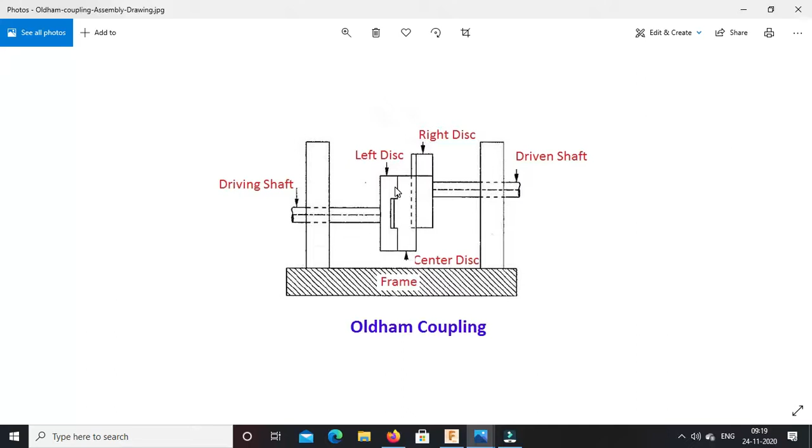Now if we want to see the working or animation of the Oldham's coupling, no part is stationary — all parts are moving because we want the shaft to rotate. So the shaft rotates, along with it the key and flange also rotate, this disc slides, and on the other side the flange along with its shaft and key also rotates. No part in this assembly is fixed.

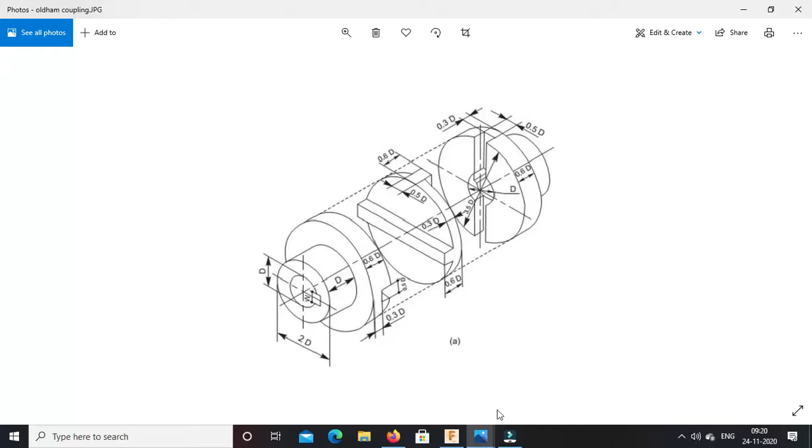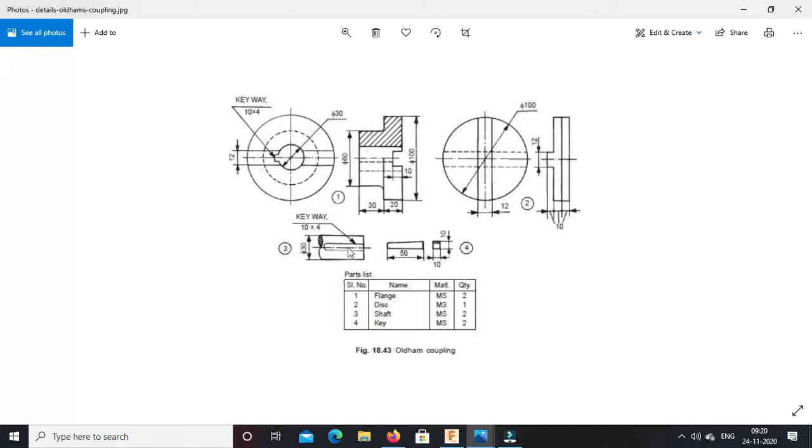But whenever we want to go for assembly, we need to fix some part, meaning we need to fix some component. So for that purpose, we will add one more component and make it the ground — that part will be fixed and all other parts will have motion. I will explain this while doing the assembly. We will start the assembly with the shaft because we want to connect this shaft along with the key to the flange.

So these are the individual parts we have prepared for the assembly. This one is the shaft, along which a keyway is cut along its length, and this is the rectangular key that is going to fit inside the keyway.

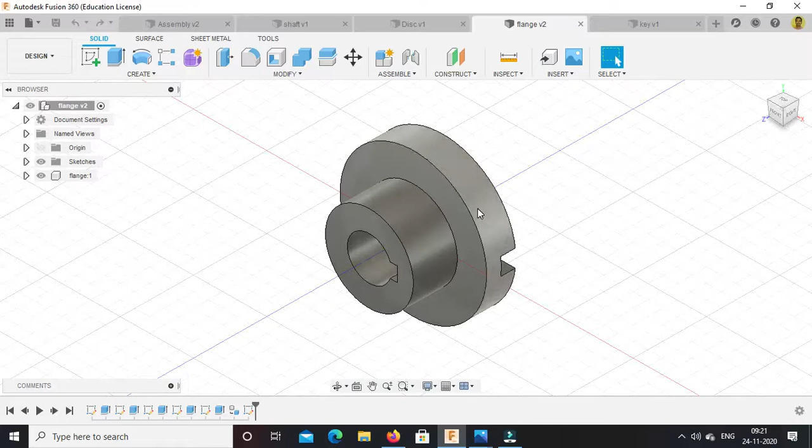Then this flange is there, which is going to attach over the shaft. Also we have provided a half keyway into this flange, so with the help of the key it will be connected to the shaft. Then this central disc is there.

On the other side we want the same arrangement, that means flange, key and shaft, but instead of making separate parts, we will make use of these parts only. It is not needed that we prepare two shafts; with the single shaft we can make the assembly. So we will start with this.

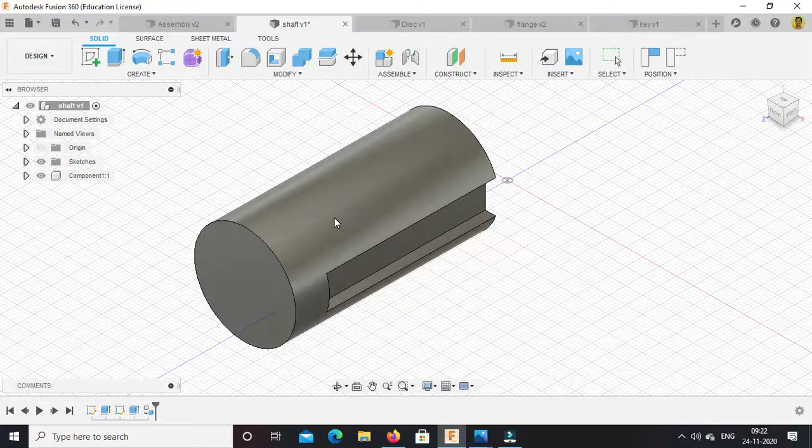Now if you observe, I have already converted all the bodies into components, which is the requirement for making the assembly. If I try to drag this component, it is movable, so I will bring it back to its original position.

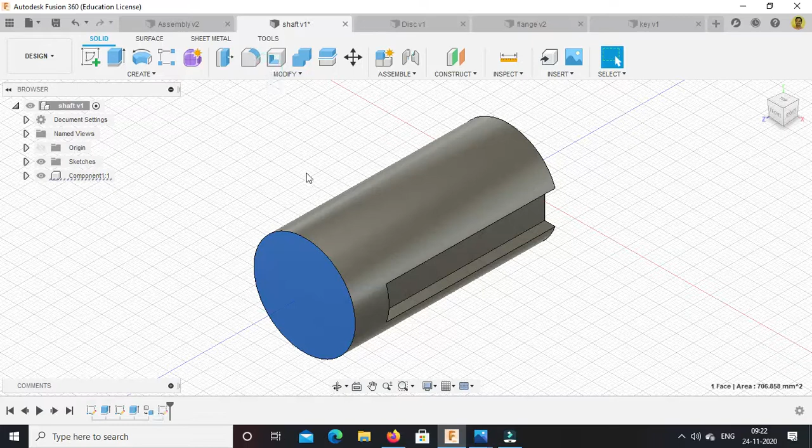Now what I will do is prepare one ring, which is nothing but the base component that we require, as I have explained. So just go to this plane, go to the create sketch option, and I will prepare one circular ring over here: 30, enter, press enter again, 40 let us suppose, enter, and finish this sketch mode.

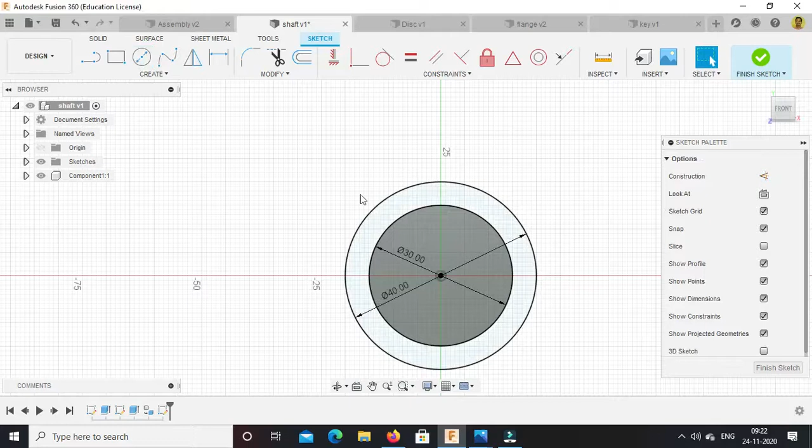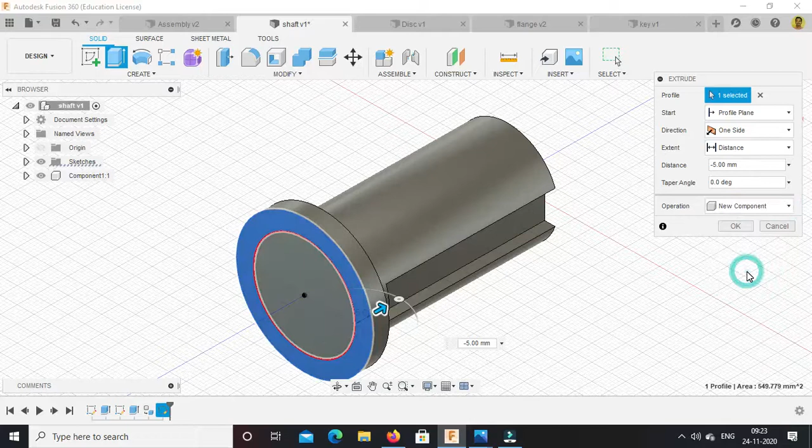Now I will extrude it, reversing the direction. Let us suppose a distance of -5, and instead of the join operation, let us select new component, then press OK.

Now if you observe, I have attached one ring to this shaft as a separate component. This shaft is a separate component and this ring is a separate component. If I try to move this, it is movable, but I will come back to the original position.

Now what I want is, as this shaft is rotating, I will fix this ring and provide a revolving motion to this shaft with respect to this ring. So just go to assembly. Already these components are connected at their place; only we want to provide a motion. For that we are going to make use of an as-built joint.

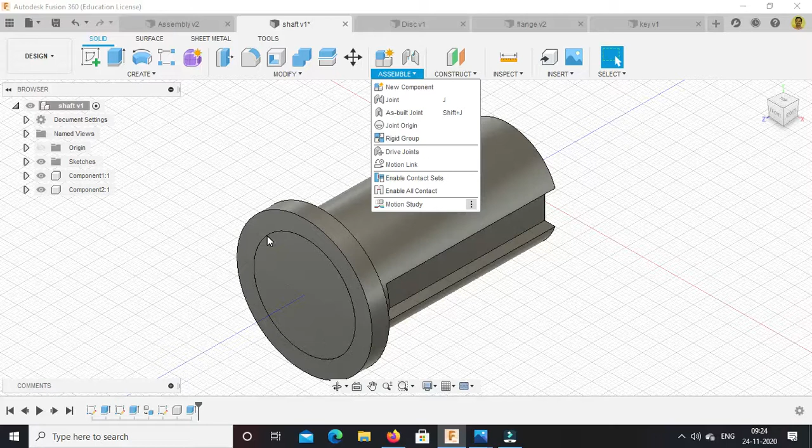Earlier whenever we used the joint command, the two parts were at separate positions, completely separated, but now the ring is at its position and we only want to specify the motion type. So for that we will use an as-built joint. First of all, make this ring as a ground so that it will be fixed.

Right click on it, ground. Now this ring is not movable, only the shaft is movable. We will come back to its original position, bringing the shaft to its original position, then select the as-built joint over here.

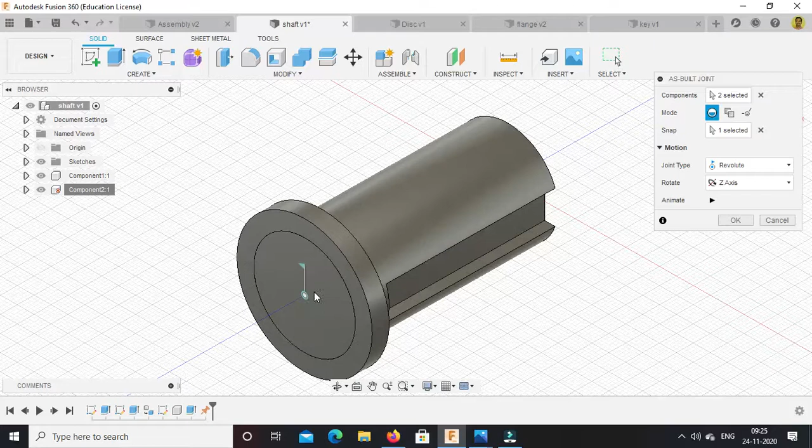Then we need to select the two components between which we want to provide a joint: this shaft and this ring. Whenever we want to take a reference for motion, we select this and select the center point, so this shaft will be rotating and this ring will remain fixed. We will press OK over here.

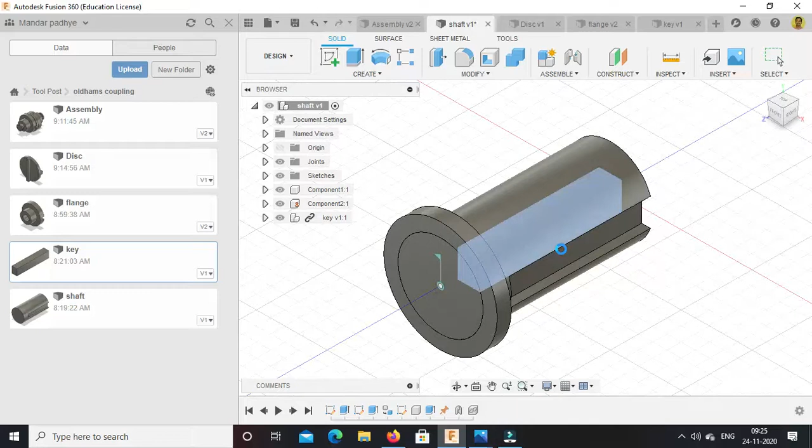Now we will attach a flange to this shaft. First we will insert the key or bring the key to this window, so just insert into current design, select this option, and we will bring the key into this window. We will drag it outside, close this data panel, press OK.

Now we want to attach this key to this keyway, or shaft. So just go to assembly. Now select joint, because these two components are separate now, so select this joint command.

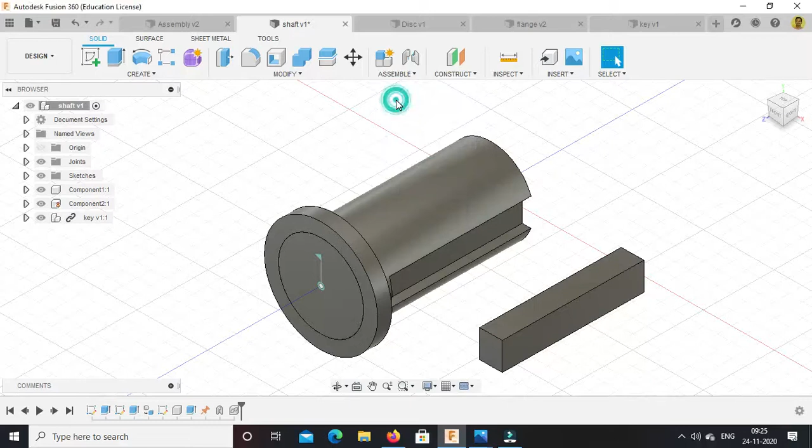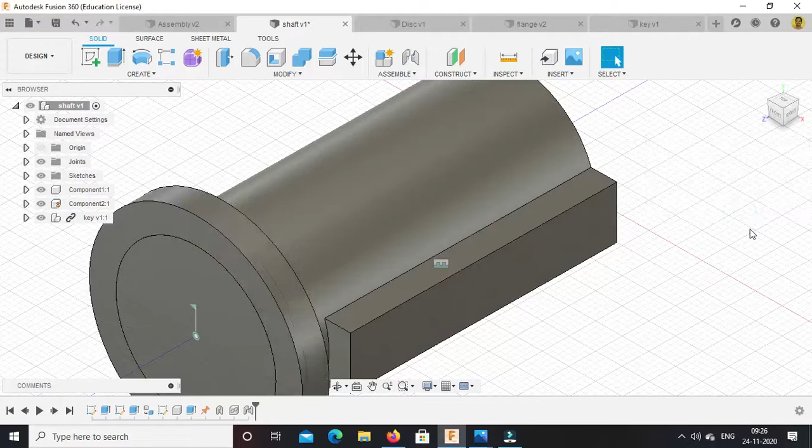Now select the face that we want to be in contact with each other, along with the center point, this center point and face. The same center point and face we will select on the shaft, and the motion type should be rigid because we don't want to move that key. So now if you observe, if we try to rotate this shaft along with the key, it will rotate. We come back to the original position.

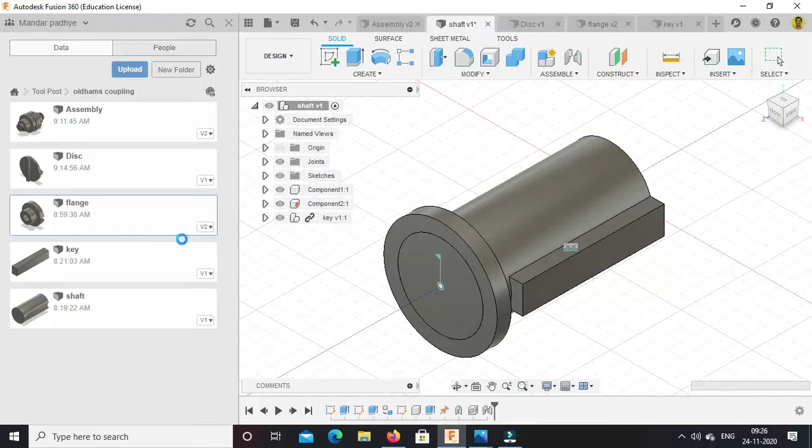Now we want to attach the flange to this shaft and key. So go to the data panel, insert this flange into the current design, press OK. Now we want to connect this flange to this key, along with the shaft, so again go to the joint command.

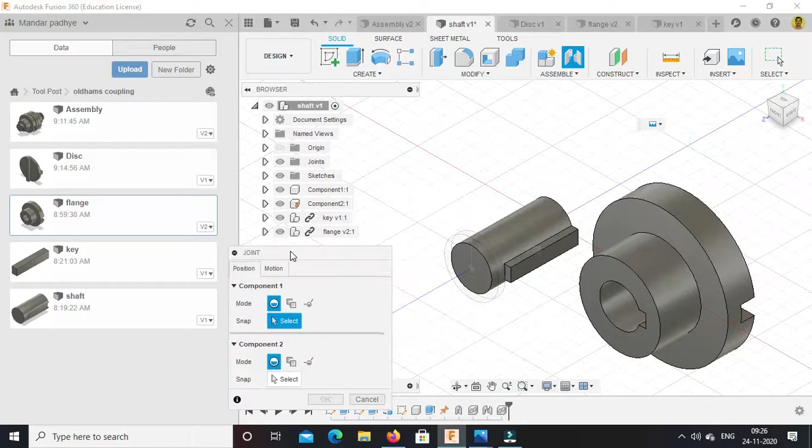Close this data panel. Now we will select this internal face of the keyway along with its center, and then connect it to the same surface with the center on the key. Now we want to check the alignment.

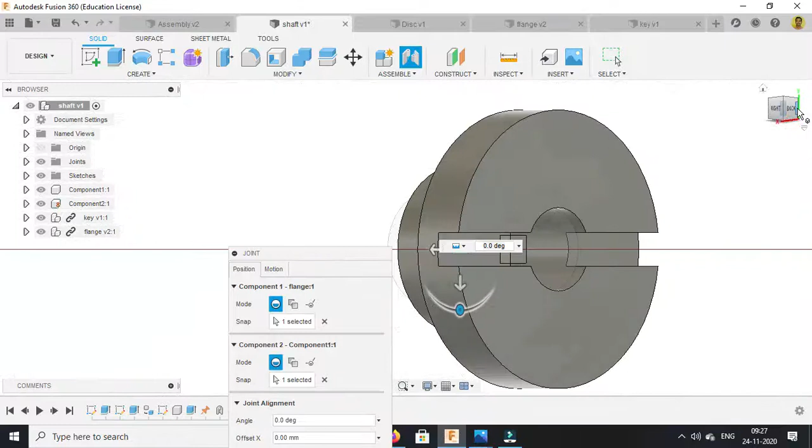If you observe, this key is coming outside, so for that we will just give an offset to it. Let us make the visual style a wireframe model and just drag it outside.

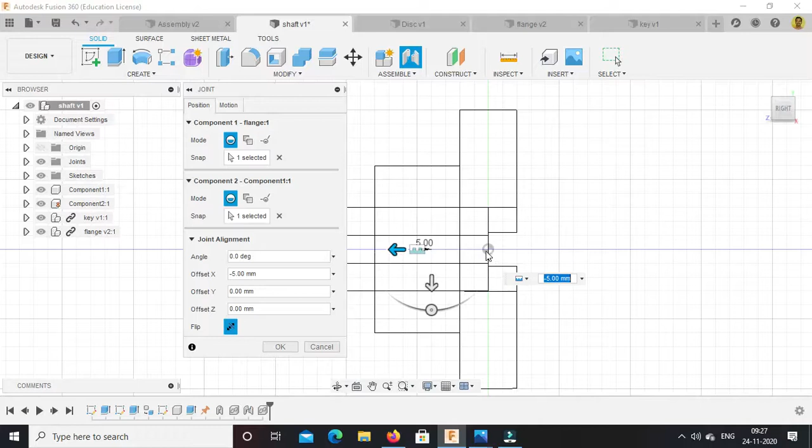Okay, so -5 is the offset in the direction of X. Press OK now. Go to visual style as visible edges only. If you observe, now the key is exactly fitted with the flange.

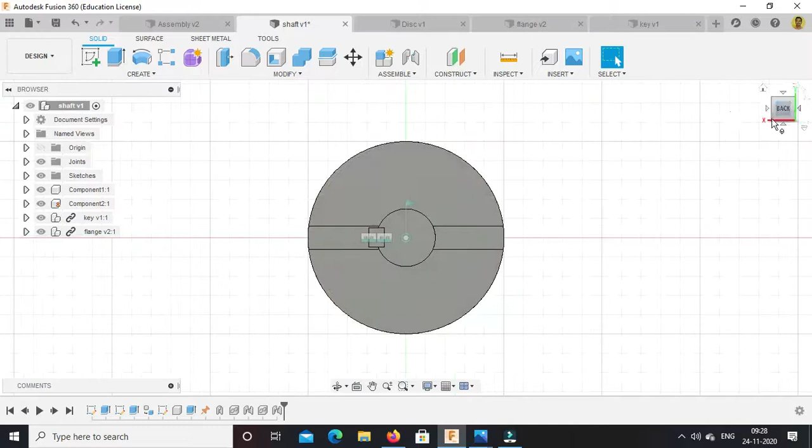Key is exactly fitted with the flange. Now if we rotate the shaft with this ring, along with the flange it will rotate, because all three components - flange, key and shaft - are rigidly connected with each other. So again come back to pivot position.

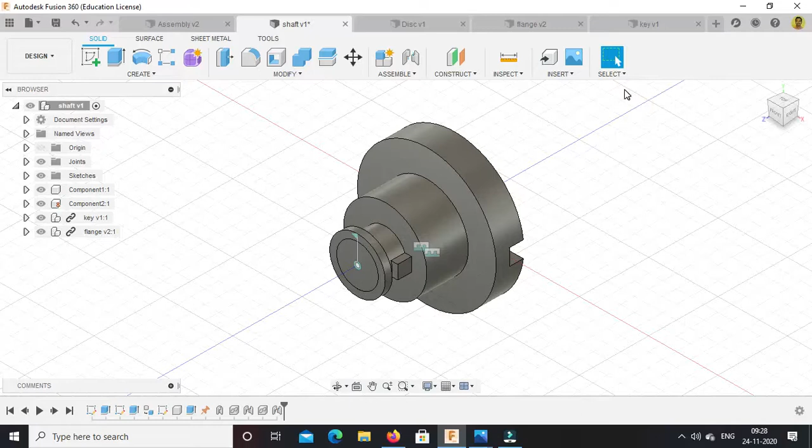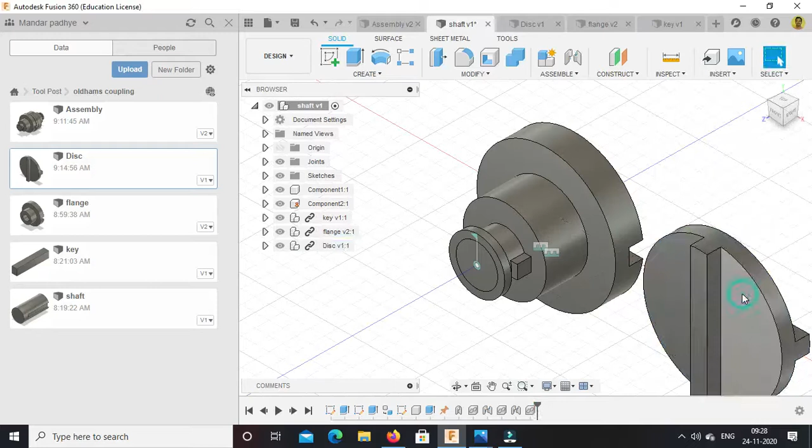Now we want to insert the disc into this assembly. Go to data panel, click on disc and insert into current design. Drag it outside, press OK, close this data panel. Now how do we want to connect this disc - whatever vertical rectangular extension is provided on this disc, we want to insert that extension into the rectangular recess we have provided in the flange.

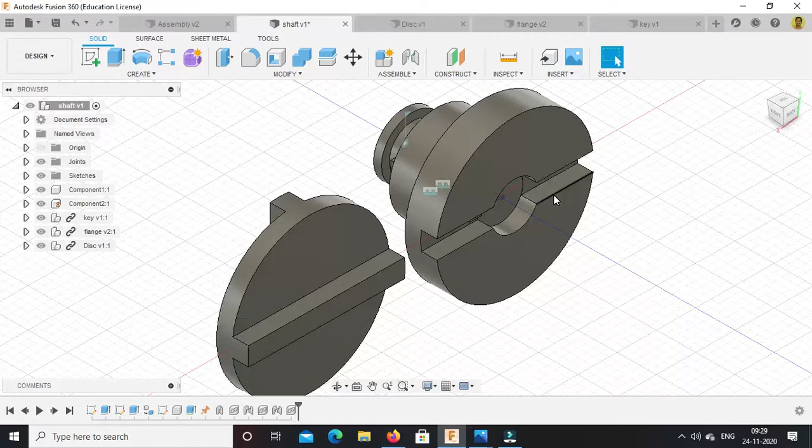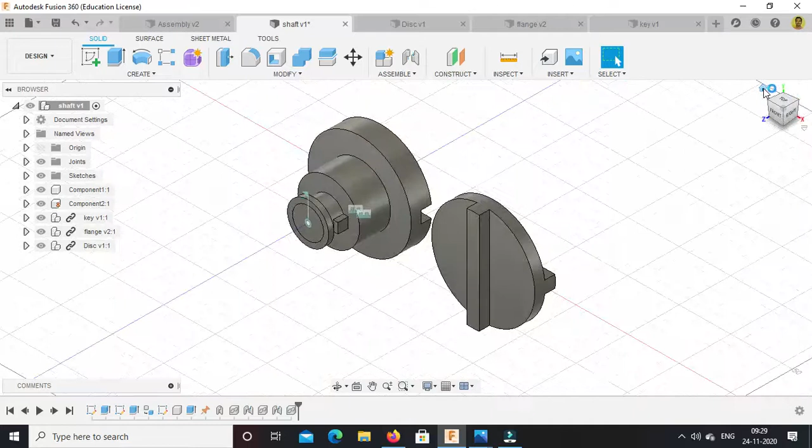So for that purpose we will create a joint. This vertical face of the rectangular recess should be in contact with the vertical face of this extension on the disc, and it should be in contact with the similar face on the recess provided in the flange, and motion should be sliding motion. So just go to joint.

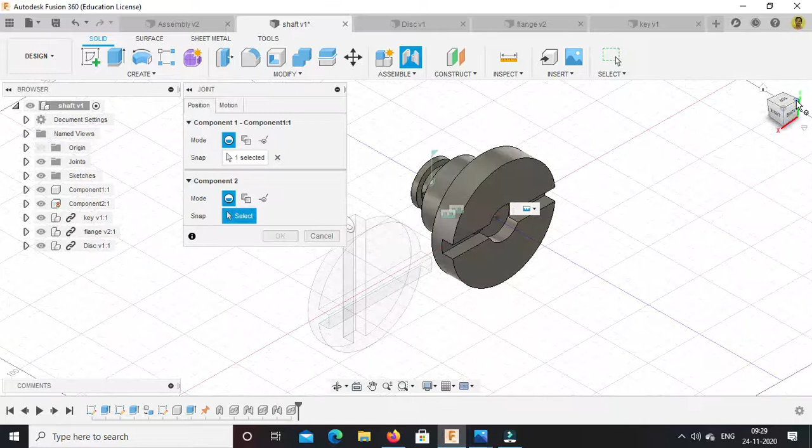Now select this with this as a reference point, this circle, and along with that let us suppose we will select this point, same, and we will provide here offset which is required.

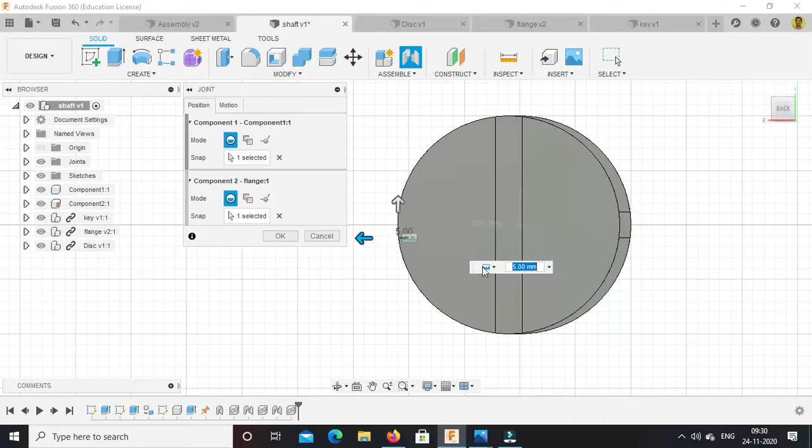Of 5 mm, let us suppose - for what purpose it is provided I will explain you later on. So it is 5 mm offset. If you observe, along with the flange, this disc is going to come outside by 5 mm, and motion type should be sliding.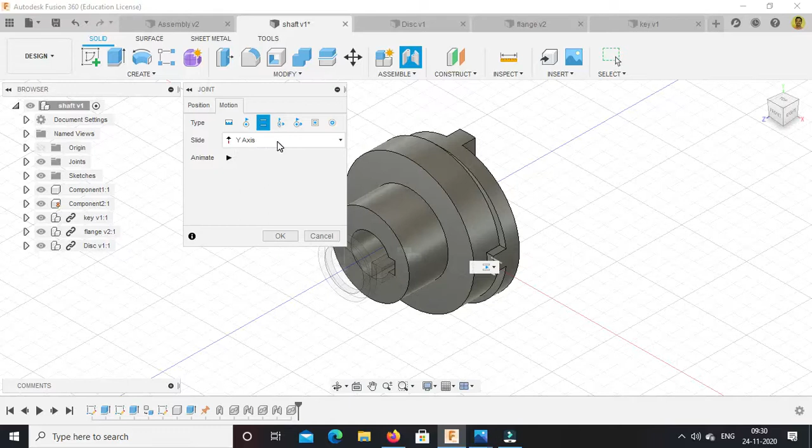Now next part is, on the reverse side also we want to provide a flange. Instead of inserting the flange again, it will not give me correct joint, for correct orientation of the flange. So for that purpose I am going to make use of a mirror feature over here.

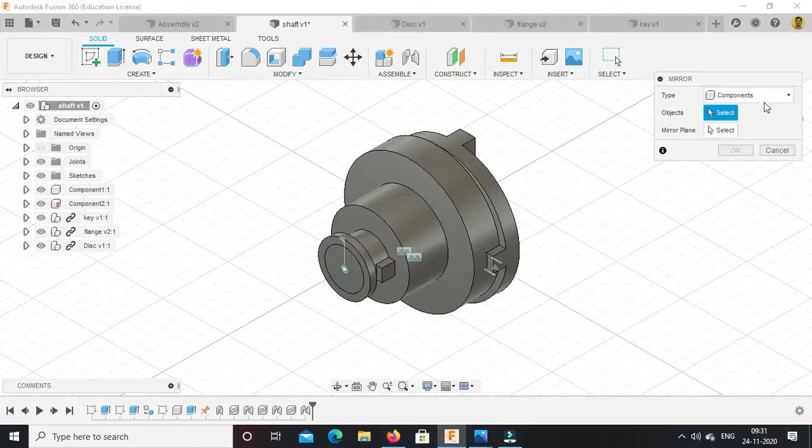Let us suppose mirror this flange along this face. Just go to create option, select this option mirror. Now component - select the object as this flange and mirror plane. You can select any face, so for that purpose I am selecting the face of this disk. Mirror plane I have selected, object I have selected, press OK.

Now again it is movable - if you observe, we can move it anywhere. Now instead of giving it a revert position or coming back to its original position, I will select the option here as capture position. Now same flange we want to keep.

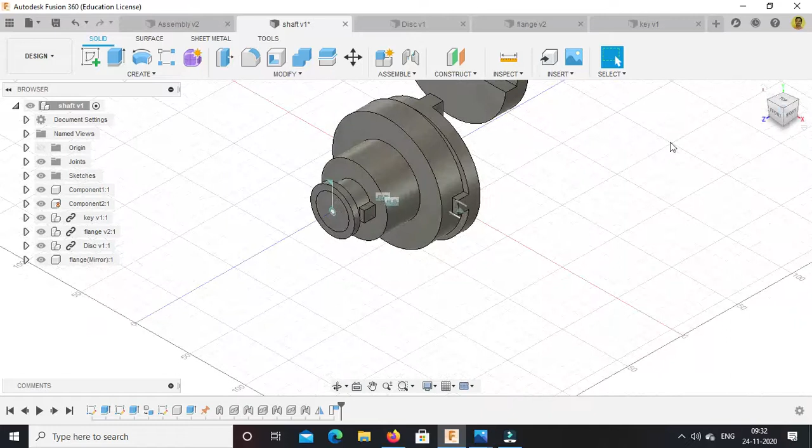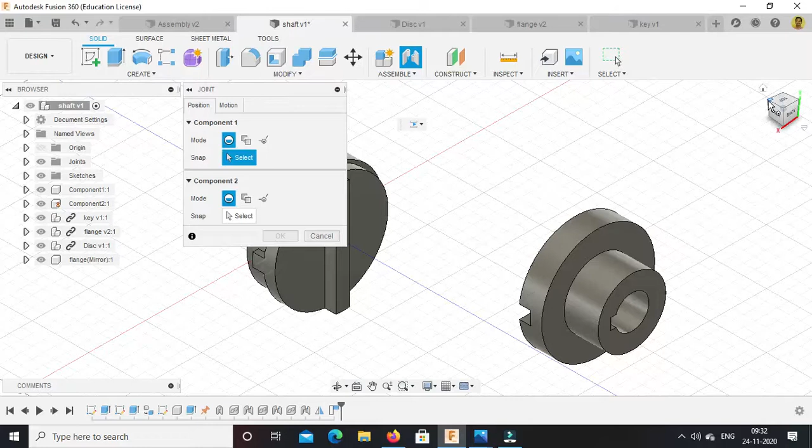This flange is having a horizontal slot, or horizontal recess, so it should be in contact with this vertical extension provided on the disk. So we will keep the joint as per the requirement. Go to joint command again. Now we want to select that similar face - this along with this should be in contact with this, and along with this as a center point.

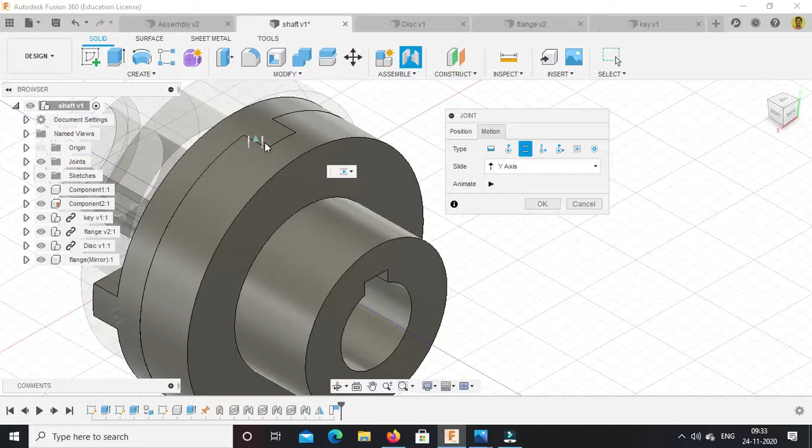Now again we want to give axis of the motion - select x axis, y axis, so it should slide along that slot only. Now we will not provide offset here - for what purpose it is not provided I will explain later. Just remember we will not provide offset here as we have provided for the earlier flange and disk. Just press OK.

Now if you observe in this assembly, if we try to rotate this shaft, all the assembly components are going to rotate along with it. So just go to revert position.

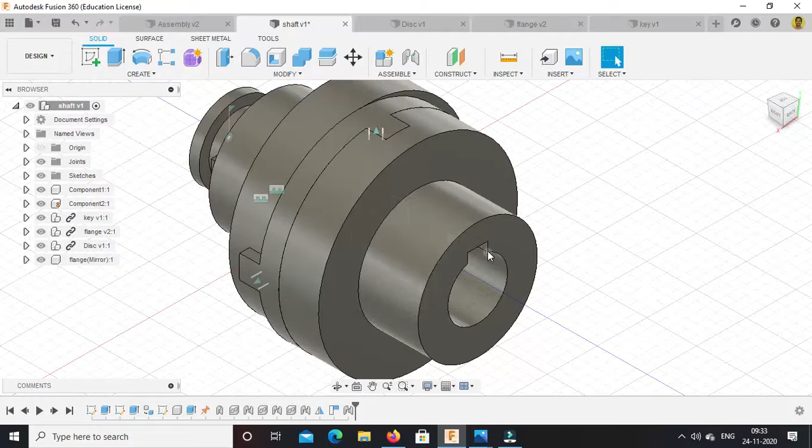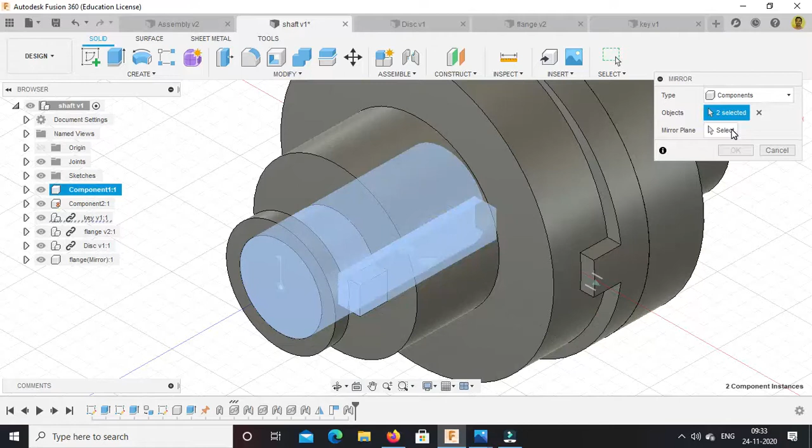Now again we want to connect shaft and key to this flange. Instead of inserting shaft and key again, we will make use of a mirror command. Go to mirror again. Now I will directly select these two components, shaft and key - two components I have selected, and mirror plane should be - I can select any face. Let us suppose we will select this back face, and press OK.

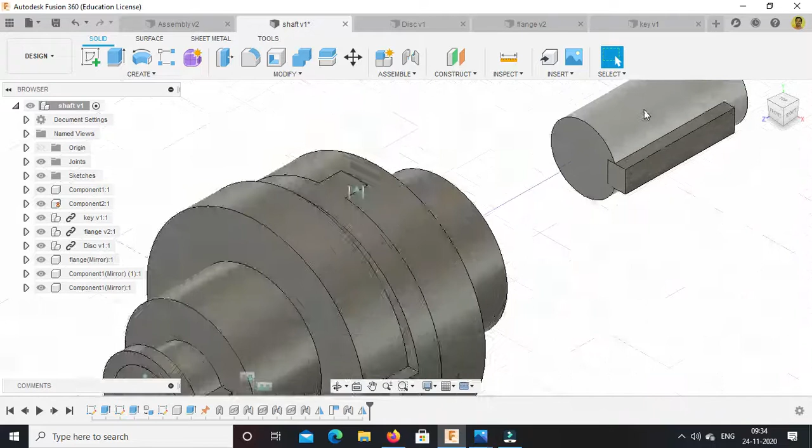Now again these two components are in place. If I want to move it, it will move, because while doing this assembly I have provided a joint over here.

Whenever I have used the mirror feature, the components are not in contact, or they have been mirrored as two separate components, so the joint command is not active over there. So again I will go to the revert position option.

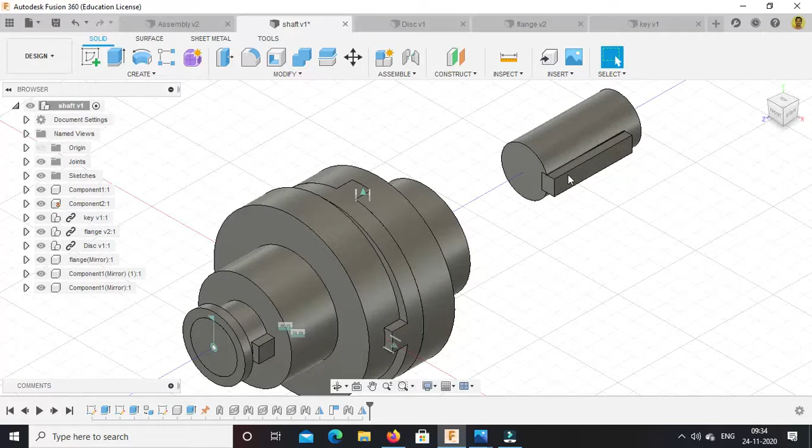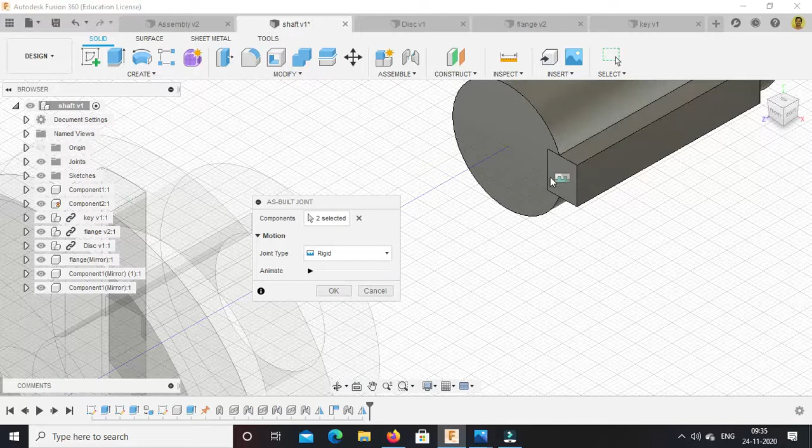Now we want to connect this shaft with the keyway. So since they are already in position, I will select the as-built joint command. Select the components, shaft and this key, and the motion should be rigid. There's no need for any snap since they are already in position, so just the rigid command will be enough. Press OK.

Now we want to insert this shaft along with the keyway into this flange. This time we will make use of the joint command because they are not already in position. So joint, then select.

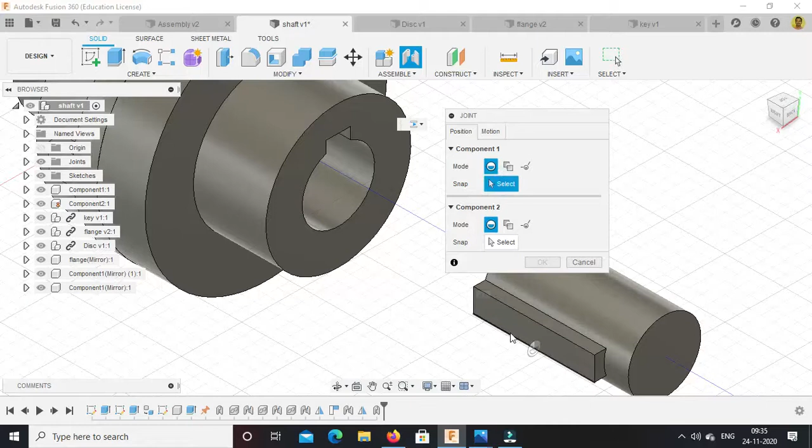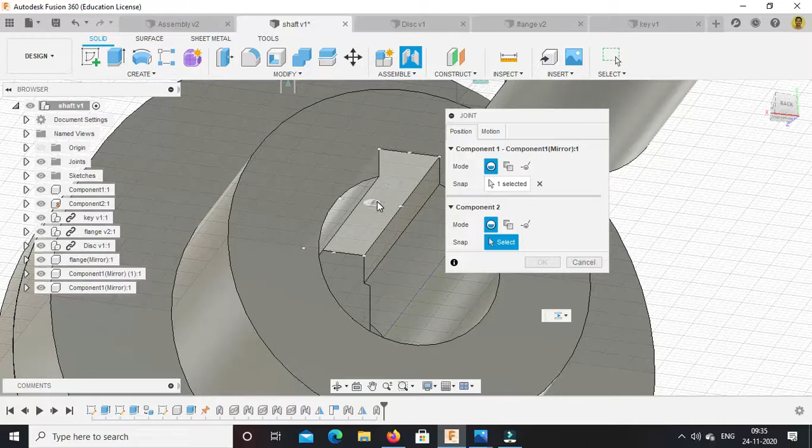Select this face of the keyway along with the center point, and the same we want to select on the keyway inside the flange. So along with this center point we will select the internal face.

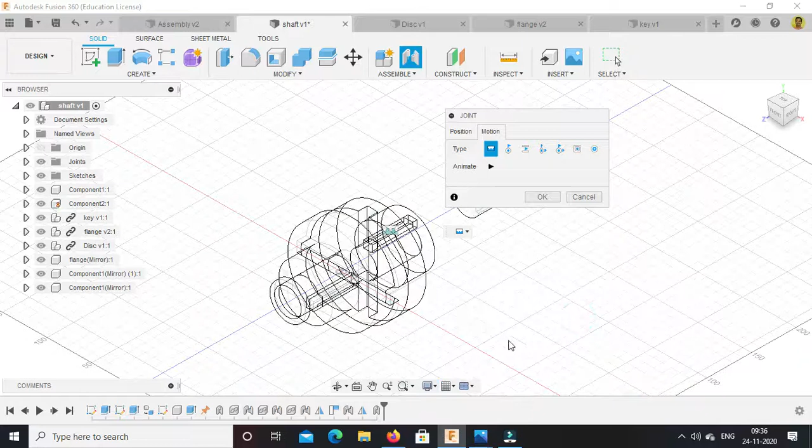Now the motion should be rigid motion, and we also want to adjust it because it should not come outside. So for the visual style, go to wireframe model and just adjust - it should not come out like this.

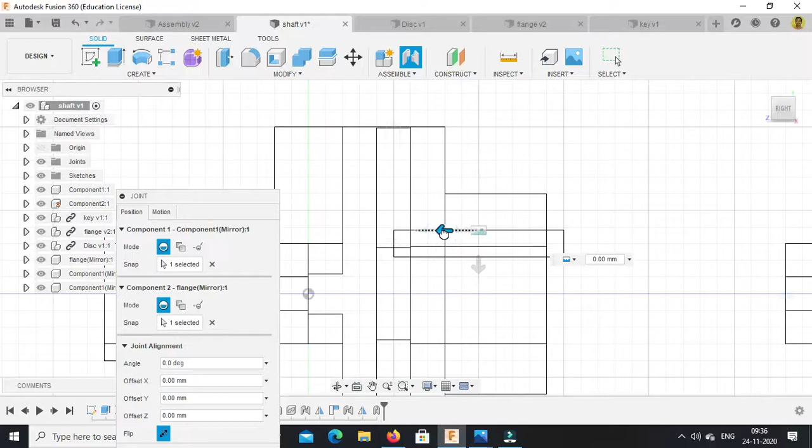We'll provide some offset over here. This should be at this position because it should not come beyond this rectangular recess. So for that purpose we have provided -5 as an offset. Press OK, and now if you observe what I have done, we will come to understand this.

This keyway was initially inserted inside, so just using the wireframe model I have adjusted it outside so that it will not go inside the flange. Now I have only provided motion between the key and flange, but since the shaft was already connected to that key, along with that key the shaft is also connected.

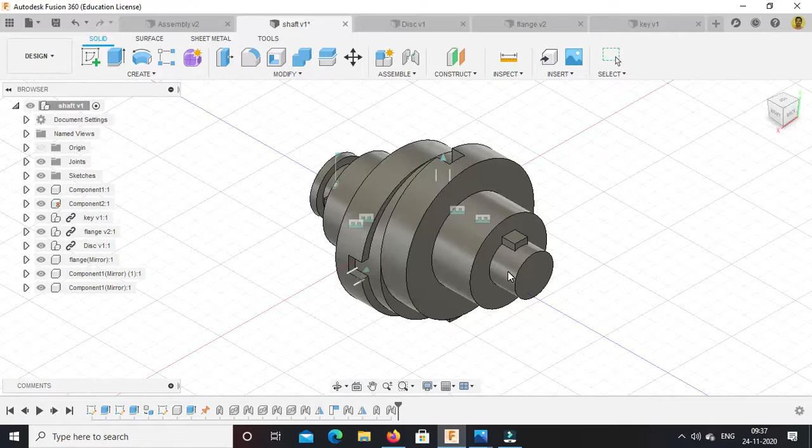Now if you observe the motion, if I rotate this - let us suppose revert it - so now if I rotate this shaft, all the components are going to rotate. But we want this shaft to rotate separately along with this other shaft.

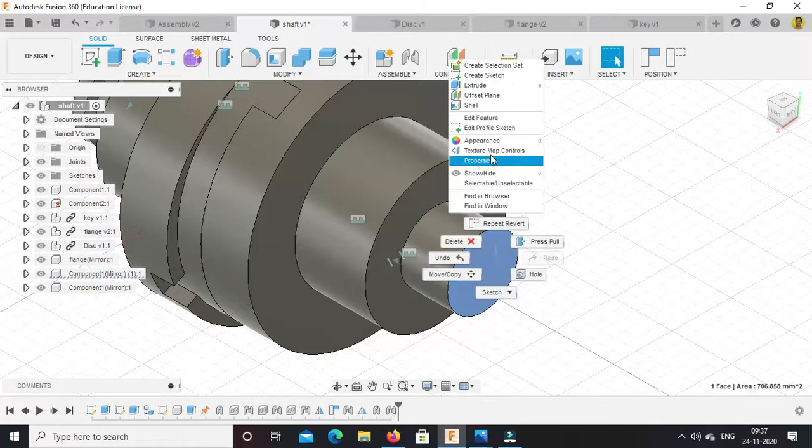So again we will provide a ring over here. Let us select this face and go to the create sketch option. So we will select this revert option. Now go to create sketch option.

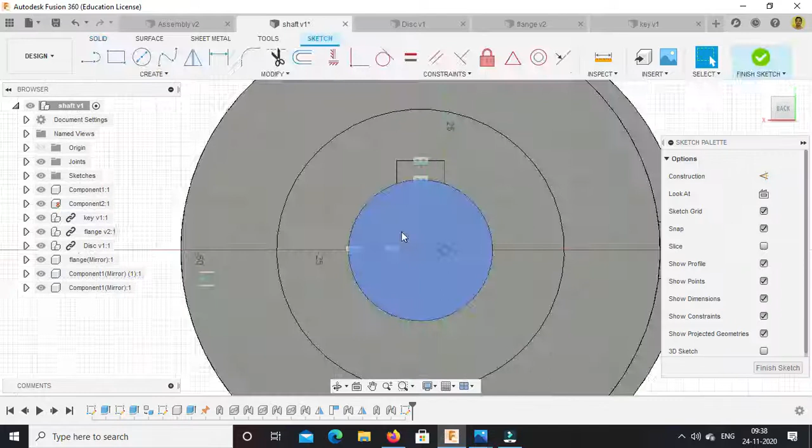Now this is the original center, and this is the offset. So we will draw again one ring of diameter 40 mm. Press enter, now finish this sketch.

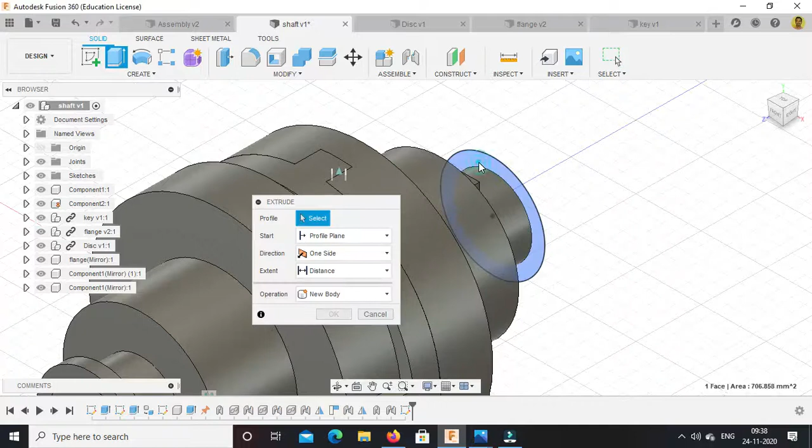Again we will provide one ring over here, so just extrude that ring by -5 and select this as a new component. Press OK.

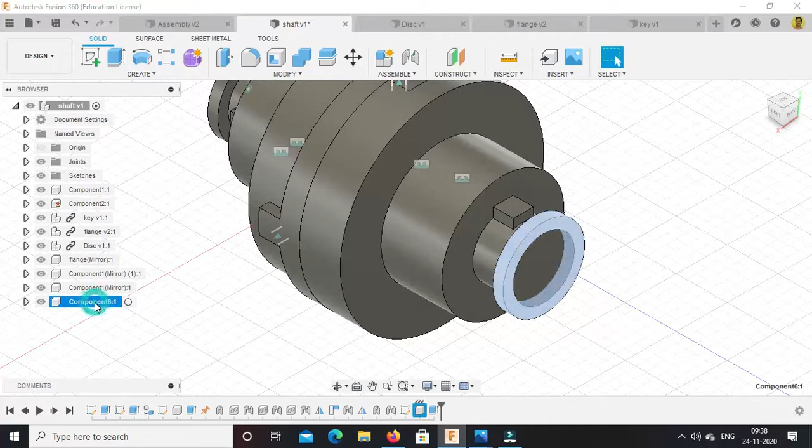Now we want to fix this ring, because it is a reference to this shaft, so we will select this and ground it. And we will provide the joint between this ring and shaft.

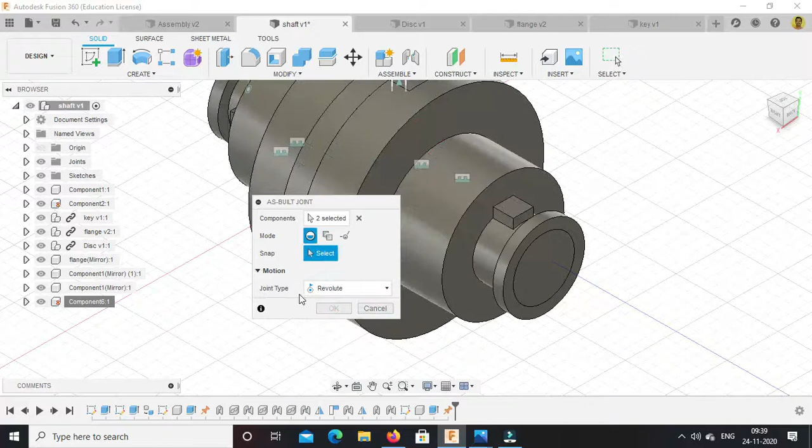As-built joint, let us suppose, because they are already in position. So the component should be this, and the motion should be revolute, and the reference point should be center, so the shaft is going to rotate with respect to that ring. Press OK.

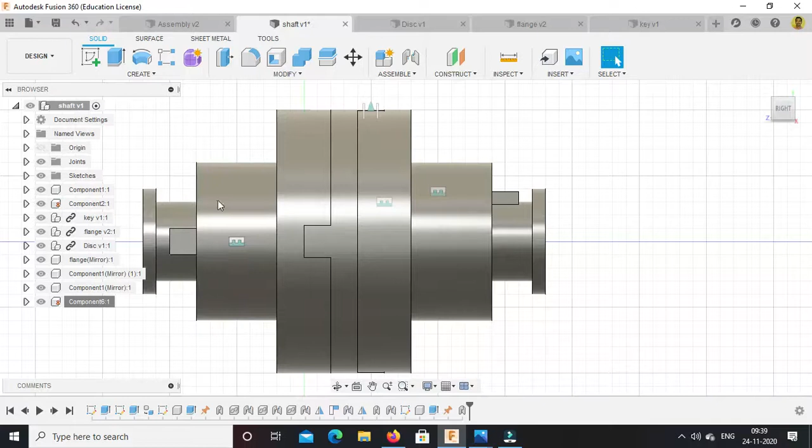Now if you observe, this ring and this ring - if you try to rotate one shaft, you observe these shafts are rotating.

They are offset with each other and they are rotating, but if you observe, this central disc is going to slide - it will come out and go in. So outside and inside motion is there, so it is going to slide between the recesses, and in that way the motion takes place.

So that is the use of nothing but the Oldham's coupling, because all the components are rotating now - only these two rings are as a ground component.

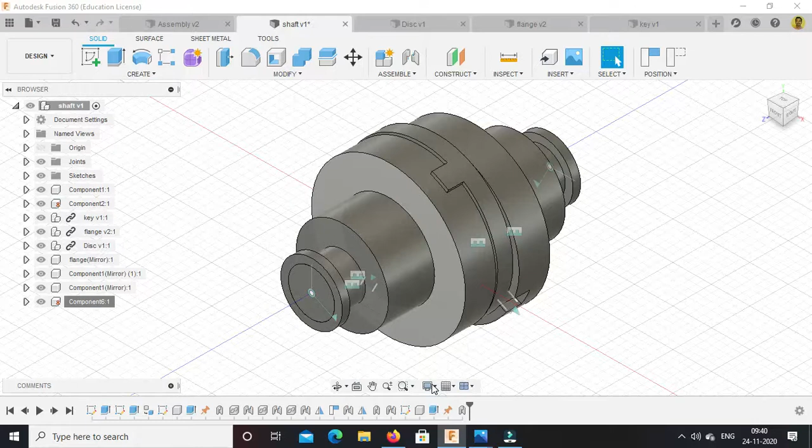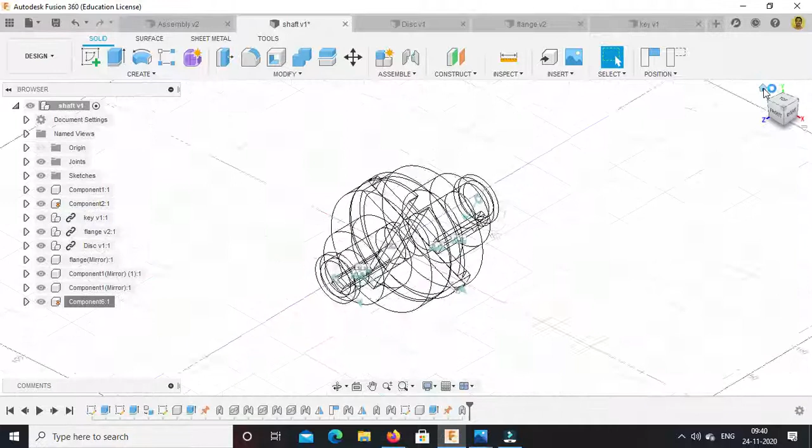So you can see how the shafts are misaligned, or that means they are not in exact line - we can see that through this wireframe model also. If you observe, these two circles are there for the central shaft, so they are not in exact line - the central lines for those two shafts are different. So they are having misalignment, but still with this Oldham's coupling we are able to transmit the motion between them.

If I am trying to rotate this shaft, along with this, this shaft is also rotating. Along with this driving shaft, as I rotate the driving shaft, the driven shaft is also rotating, and in between, the components are able to transmit the motion. That is nothing but the Oldham's coupling - this is the assembly for the Oldham's coupling.